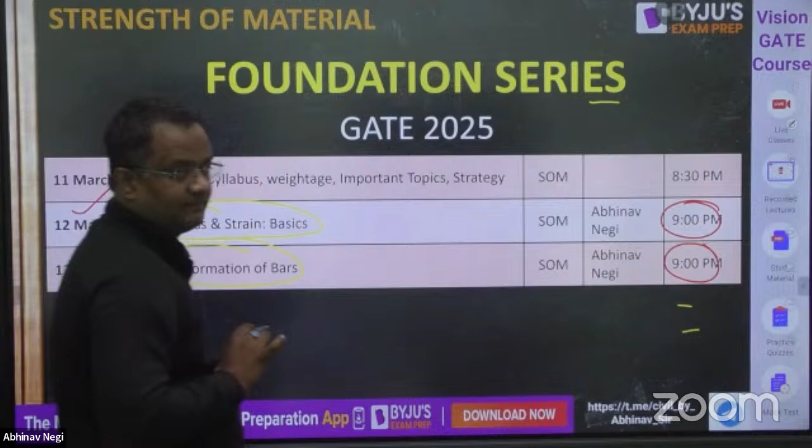Tomorrow it will be stress and strain basics, and deformation of bar the day after. Both sessions will be at 9 p.m. on YouTube. This is on 12th of March and then 13th of March - it will be strength of material.

Then, in the weekend, Saturday and Sunday, I will be taking classes. On Saturday, I will teach you the stress strain diagram, and on Sunday, you will get properties of materials, which will definitely be the properties we are going to teach with respect to the stress strain diagram as well. In these sessions, we will cover both theory plus numericals. The timing will be the same. So that is about my sessions, and this will also show you the way we are going ahead for every topic.

So this is the schedule of the strength of materials - tomorrow, day after tomorrow, and the weekend, by Abhinav sir.

Then next week, another subject will be done. For civil, it will be environment by Richa ma'am from Monday, and for mechanical, it will be thermodynamics by Vipin sir. So every week one subject will be done. Now your question will be, sir, in one week a subject will not be completed - yes, correct. We are not saying that SOM will only be taught in this one week.

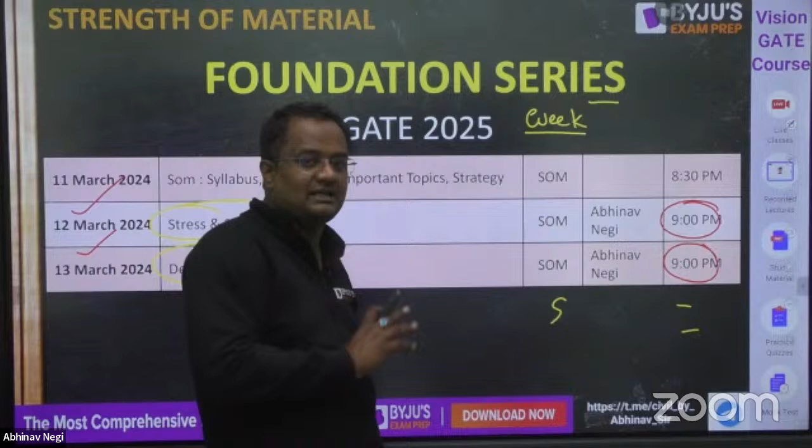There are 50 more weeks to go before GATE 2025, so there will be many more SOM classes. This is just a beginning. Some topics will be taught in this week of SOM, then again in the next week another subject will come - for civil it will be environment, for mechanical it will be by Vipin sir - then again SOM will come. Don't worry about that. Every week we are taking topics, and the topics will be taken not randomly - we'll be taking the topics of the first chapter only.

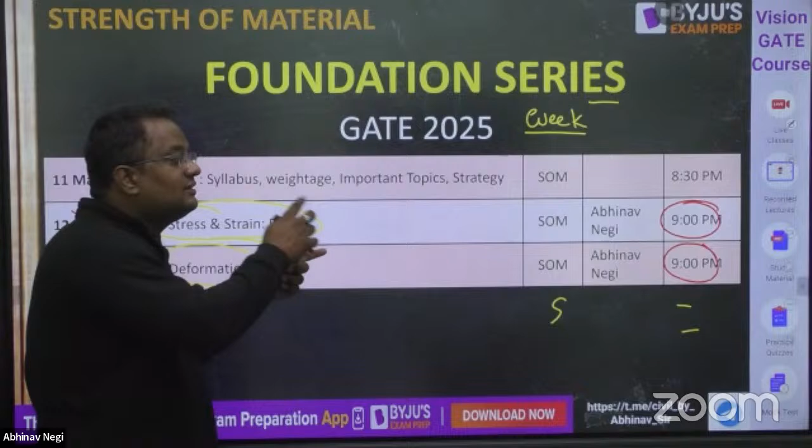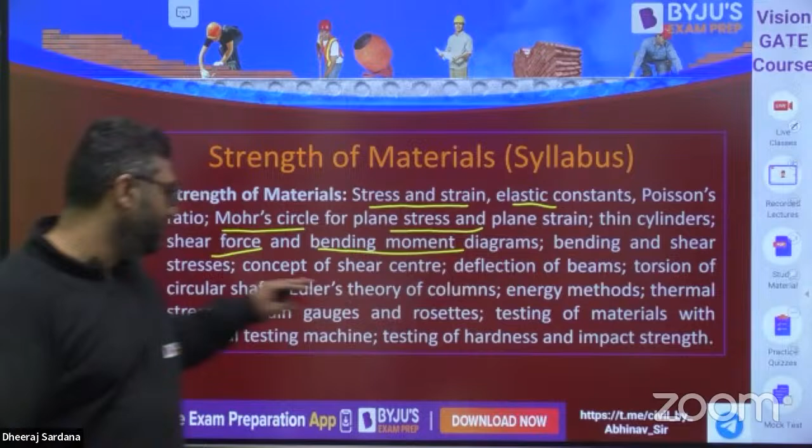So guys, this is the syllabus for GATE. You can say strength of material, stress and strain, elastic constants, Poisson ratio, Mohr circle for plane stress and strain condition, thin cylinder, shear force diagram, bending moment diagram, bending and shear stresses, concept of shear center, deflection of beams, torsion, Euler's theory of column, energy method, thermal stress strain, and strain gauges and rosette testing of materials.

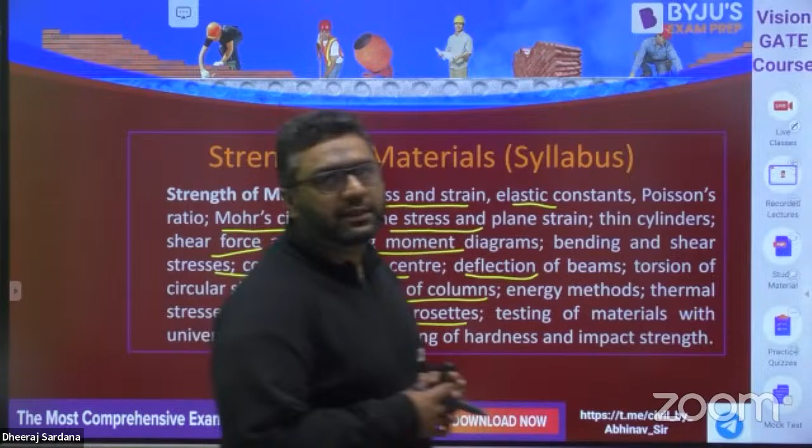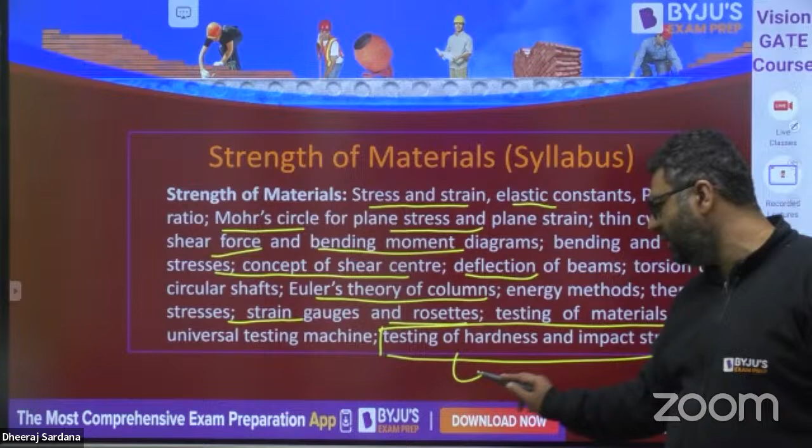So I would like to tell you, for mechanical and civil, almost the syllabus is the same. For GATE and engineering services too, almost the syllabus is the same. Only there is one topic, testing of hardness and impact strength, which is only for mechanical students. All other topics will be common for both mechanical and civil, and the syllabus is the same for GATE and engineering services. Only the way of asking questions is different.

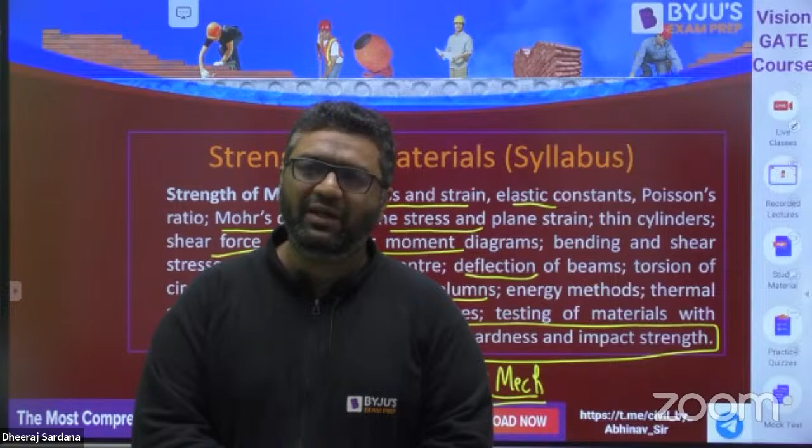So when we teach you, this will be covered for all the examinations where technically strength of material is part of the syllabus.

Now, guys, let me tell you about the weightage of strength of material for civil engineering students. If you see the average weightage of the last 5 to 9 years, strength of material is usually coming around 5 to 6 marks.

Of course, for civil engineers, geotech and environment carry high weightage. Geotech, environment, and transportation will carry approximately 35% of the weightage, and 15% will be aptitude and mathematics. So geotech, transportation, environment, maths, and aptitude will carry around 50 to 55% weightage, and all other subjects combined will be 40%.

But let me tell you, for a civil engineer and also for a mechanical engineer, when you decide the order of subjects, strength of material, engineering mechanics, or fluid mechanics should be the first one. The reason is simple: subjects like structure analysis, RCC, and steel for civil will only be understood when you do strength of materials. Similarly, for mechanical, machine design plus parts of production will only be understood when you have a clear knowledge of strength of material.

So strength of material is a basic subject not only for civil but also for mechanical branch, because other subjects are related to this. For studying strength of materials, no knowledge of other subjects is required, so this can be taken as a first subject as well. Although I recommend doing engineering mechanics prior to this, it's good. But even if you haven't done engineering mechanics before, you can still go with strength of materials.

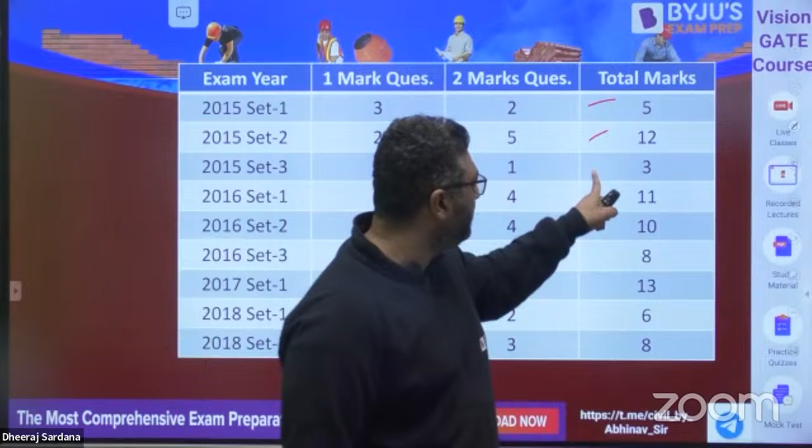Now, for mechanical, sir will tell you about the weightage of strength of material in various years, and of course for civil also I'll tell you. You can see the weightage from 2015: in set 1 it was 5, then 12, then 3, then 11, then 10, then 8, then 13, 6, 8.

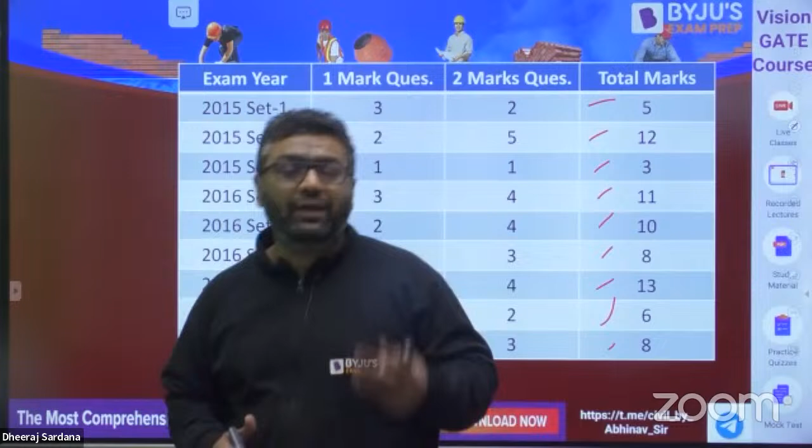So you can see various values here because at that time the paper was offline, the number of candidates was more, and because of that various sets were there. In online exams also various sets were there because the number of students was more. But if you see the recent year weightage, like in 2023 it was 14 marks, in 2022 10 marks, then 6 marks, 7 marks. So if you see the average of the last 10 to 12 years, strength of material is coming for 8 to 10 marks.

The reason for high weightage is that various subjects depend on this, like machine design and metal forming, specifically from production. They depend on strength of materials. That's why the weightage for strength of materials is always 8 to 10, a good weightage. Even in civil, 6 to 8% is decent, and for mechanical, out of 72 marks, it may go up to 8 to 10%. That's a decent one. This is an important fundamental subject you have to do, otherwise you cannot crack interviews either.

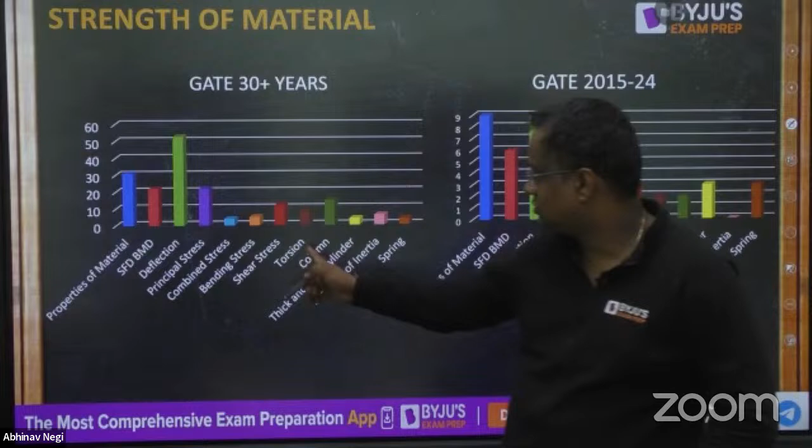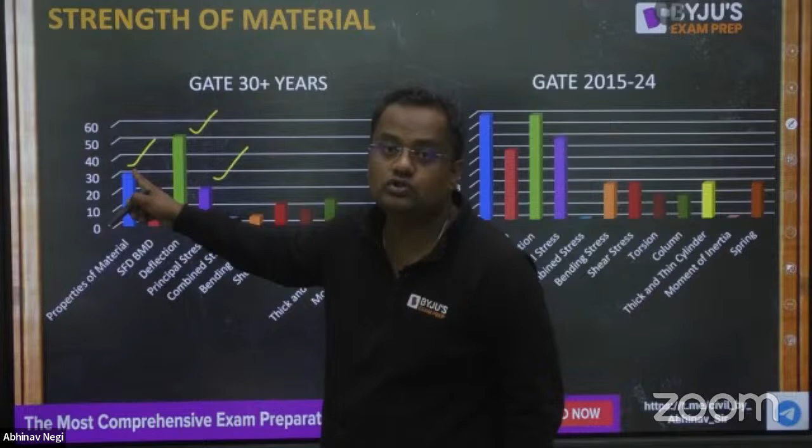Now, for both civil and mechanical branches, what is the weightage of various topics of strength of materials, like properties of material, SFD, BMD, deflection, principal stresses, combined stresses, bending stress, shear stress, torsion, columns, and thin cylinders? Topics like principal stresses, deflection, and properties of material, which includes stress-strain curve, thermal stresses, and Poisson's ratio, along with stress-strain curve, deflection, and transformation of stress, carry almost 60% of the weightage in GATE and other exams too. From these three topics, if you see the last 8 to 9 years, the same topics like properties of material, deflection, and principal stresses are very important, and of course SFD and BMD also.

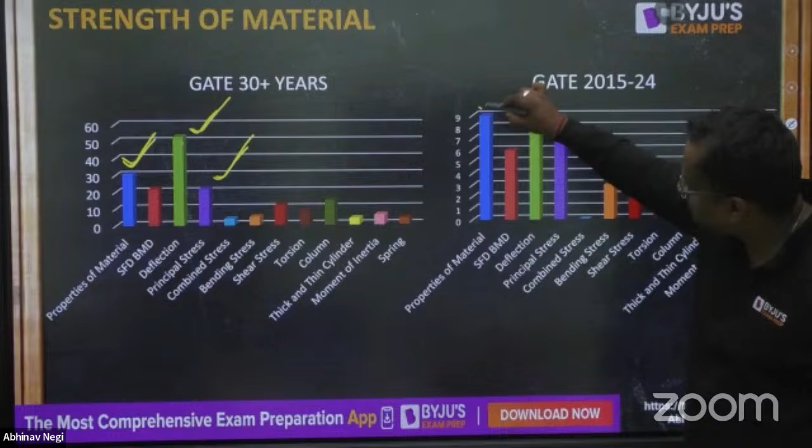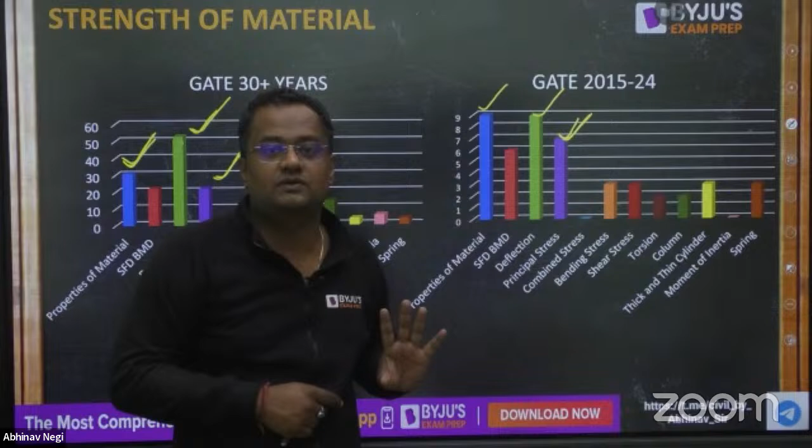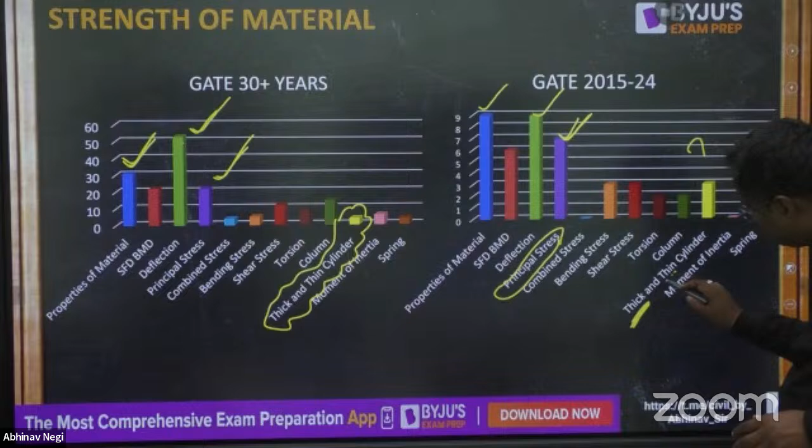In the last 3-4 years, in every set of civil engineering, the question on transformation of stress is there—morning shift, evening shift, both have transformation of stress questions. I've observed this for the last 4 years, this principal stress or transformation of stress. Apart from that, one topic which was asked less in previous years in both civil and mechanical is thin cylinders, but now the question is asked every second year from thin cylinders. Thick cylinders are not frequently asked, but thin cylinders are, in both civil and mechanical. So the weightage of thin cylinders has increased in recent years, and the weightage of properties of material, principal stress, and deflection has increased too—it was already high before.

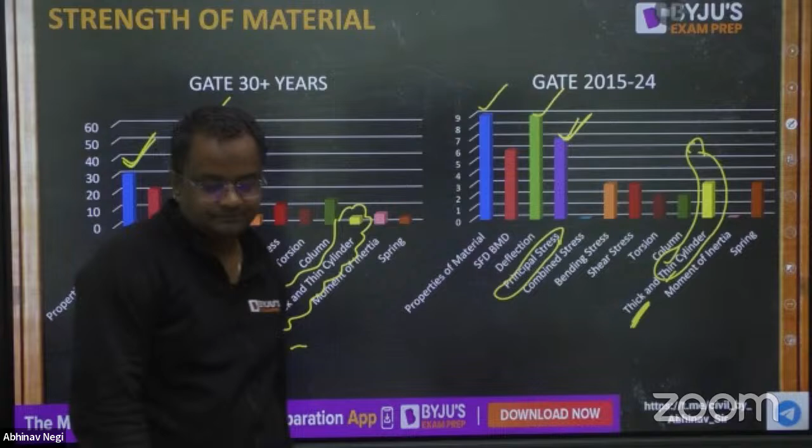Now this is for structures.

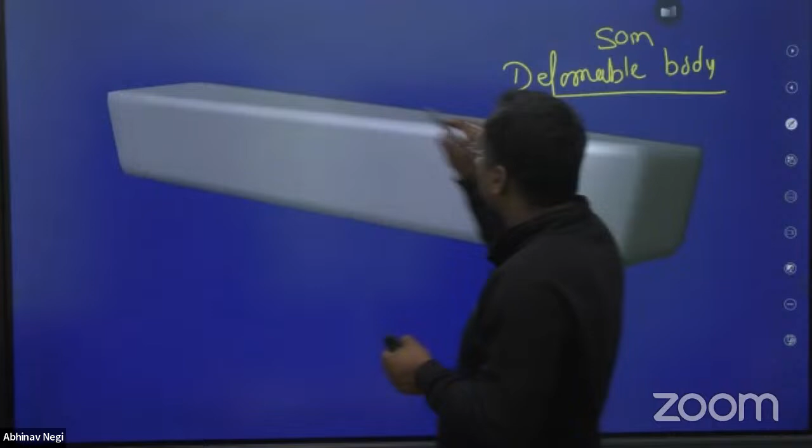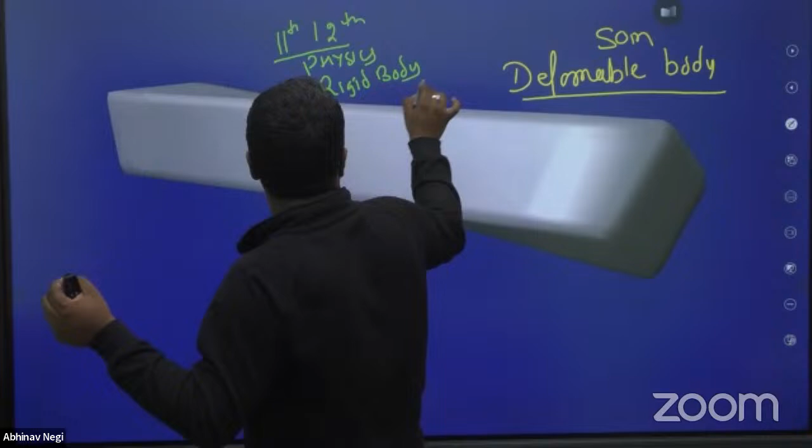Now, what is strength of materials? What will we be studying in this subject? We'll be studying about deformable bodies. Whatever physics you've studied till now, that is rigid body physics. In your 11th and 12th class, whatever physics you studied assumes a body to be a rigid body, except the fluid mechanics chapter and the stress-strain chapter—everywhere else we assume it to be a rigid body. But in strength of materials, you assume the body to be deformable.

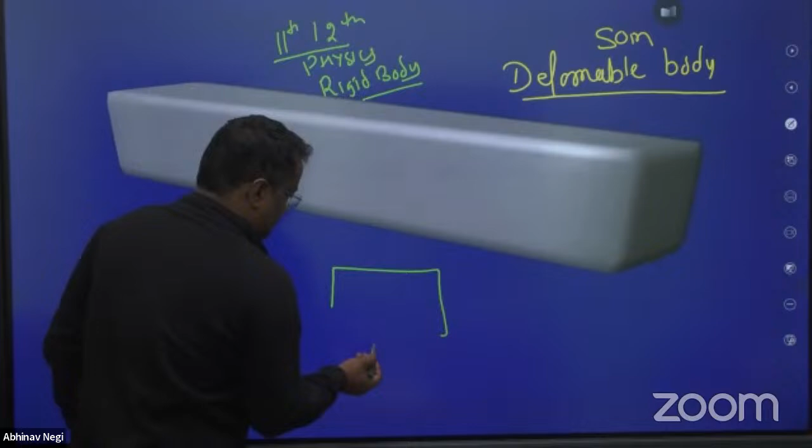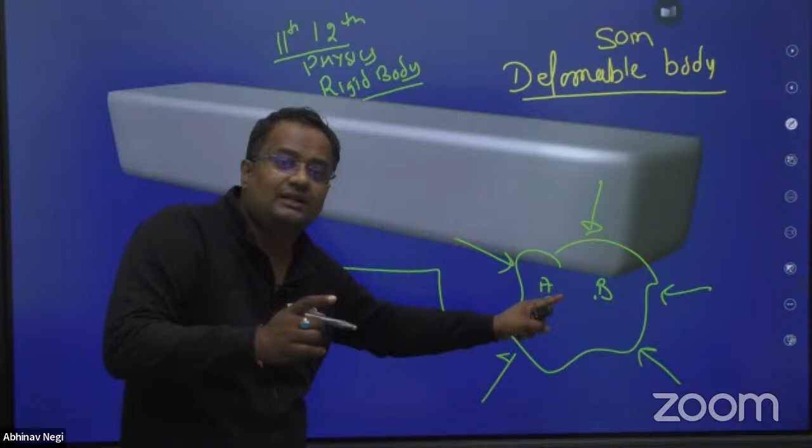Now, what is the difference? Suppose this is a body, it can be in any shape, with two points A and B. Now you apply force on this body in any direction, any number of forces, any direction, any magnitude—I'm repeating, any number of forces in any direction and any magnitude. If the relative position of A and B doesn't change—distance doesn't increase or decrease, orientation doesn't change—then this is a rigid body. Rigid body is a pure assumption; in reality, the length changes, or shape changes, or orientation changes.

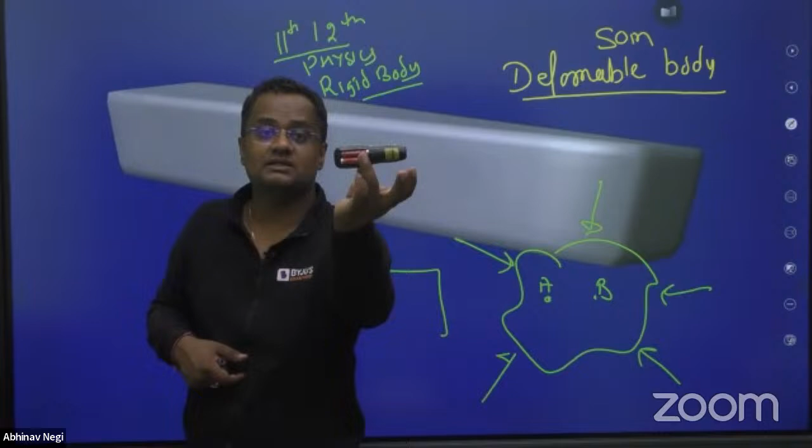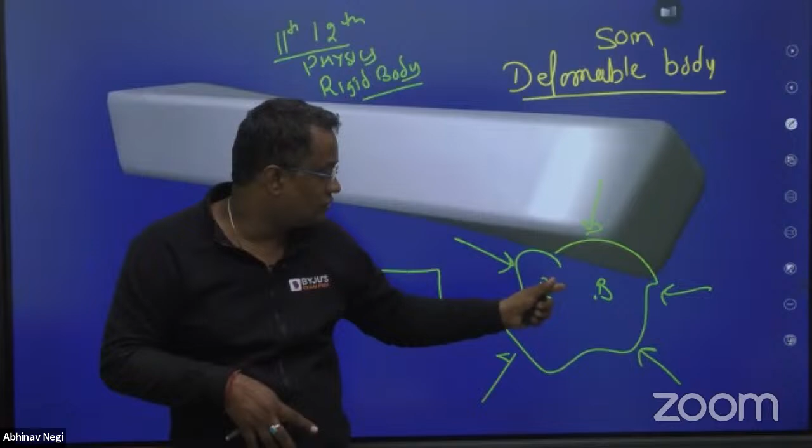That change may be very insignificant, but it occurs. Like in summers, the length of this marker increases by alpha delta T, but that's not visible to our naked eyes because it's very minute. So rigid body is just an assumption. The real physics you'll study is deformable physics—when you apply force and the orientation of points changes, that's deformable physics. Either points come closer, move apart, or orientation changes. That is deformable physics. Over to Dheeraj sir.

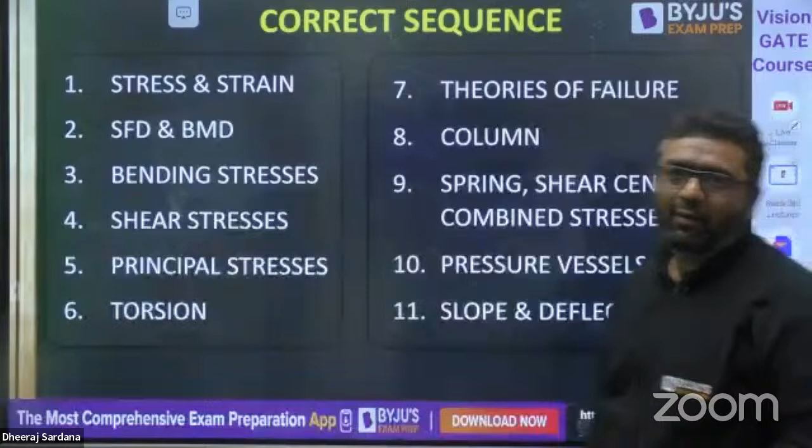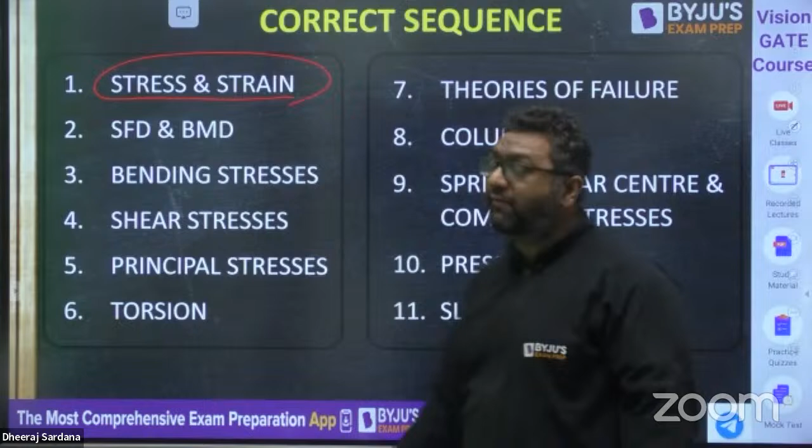As sir has beautifully explained about the deformation of bars, now we are talking about the sequence of topics. In 11th class you have studied the solid mechanics part, where you just defined stress and strain, not going much beyond that. So here we will be starting with stress and strain.

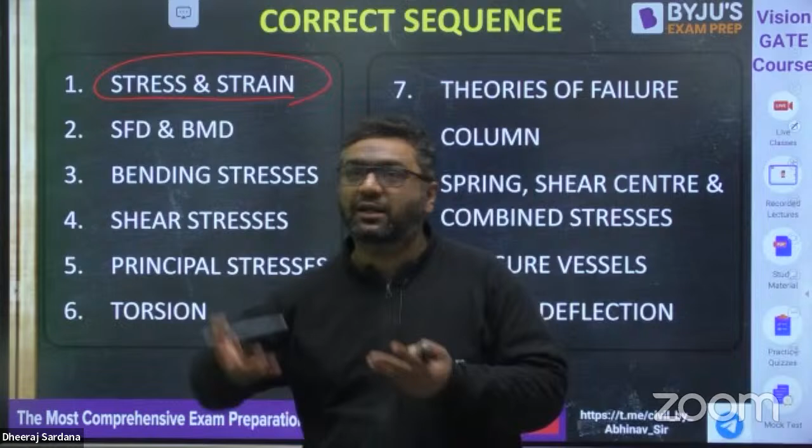We will see the various relations between stress and strain, what are elastic constants, and also their own relations, and how we can find out or calculate the stresses with the help of measurement of strain. Then guys, we will be entering into SFD BMD.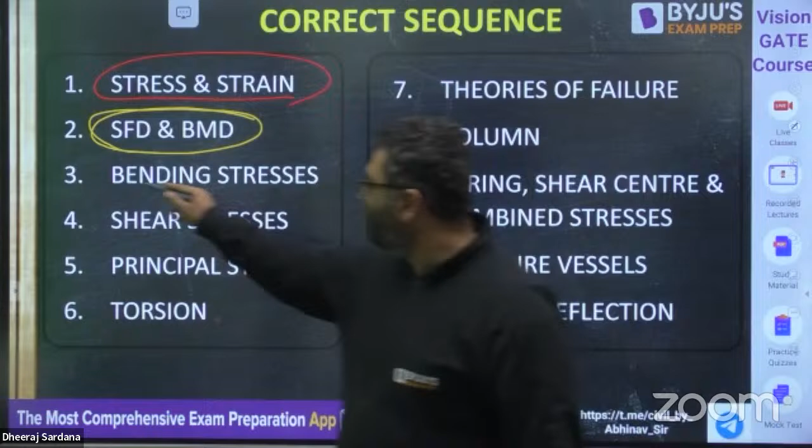This is the favorite part of Abhinav sir also. So then we will be having shear force diagram, bending moment diagram. Then we will be having the bending stresses. After that, the shear stresses.

So here, what we are doing is studying the stresses individually. First we study the stresses because of forces in this chapter. Then we are going to see the stress because of bending couple here. Then we are going to see the stress because of shear force here.

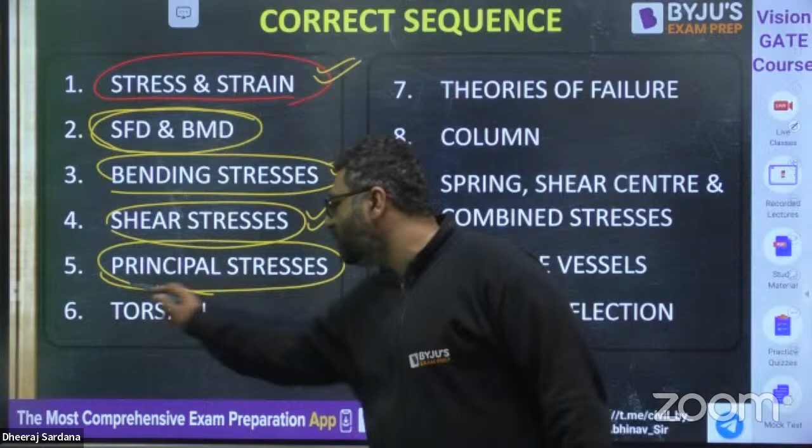So when individual study is completed, then we will accumulate all the types of stresses together to understand the principal stresses or transformation of stresses. And guys, then we will study torsion, which is the shear stresses because of twisting couples, like here we study because of bending couples.

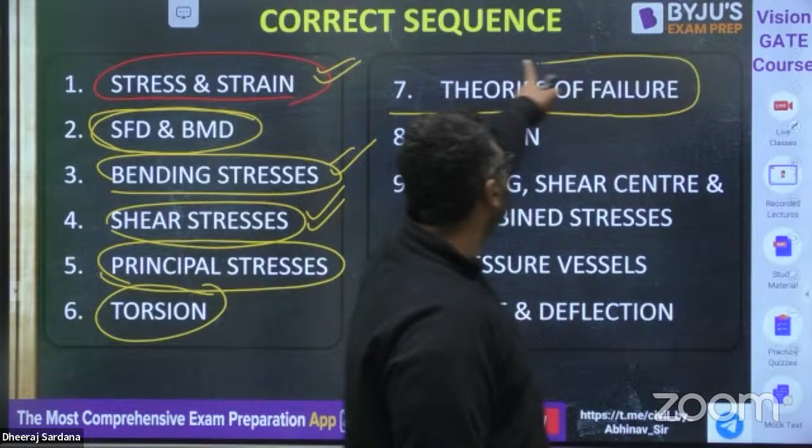Then guys, there is a topic, theories of failure. This is a topic which is going to join design with SOM - how the things are going to be designed is connected with SOM. Like when you go to the doctor, you tell your problems and the doctor gives you a solution. So you can see that solution part when we reach there - that is the bridge to that solution part, theories of failure.

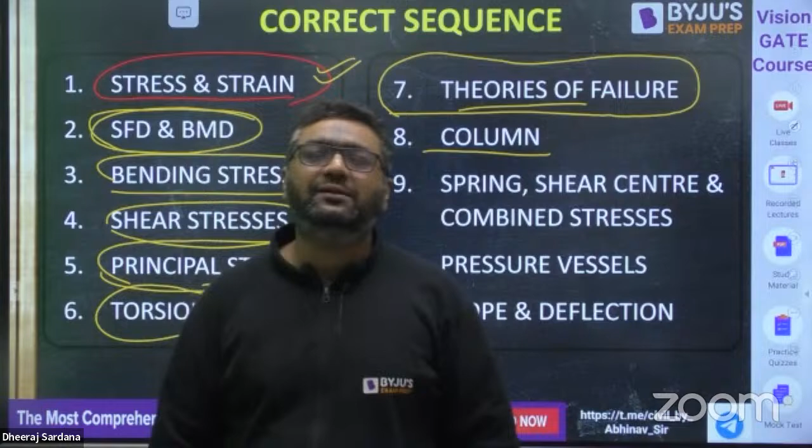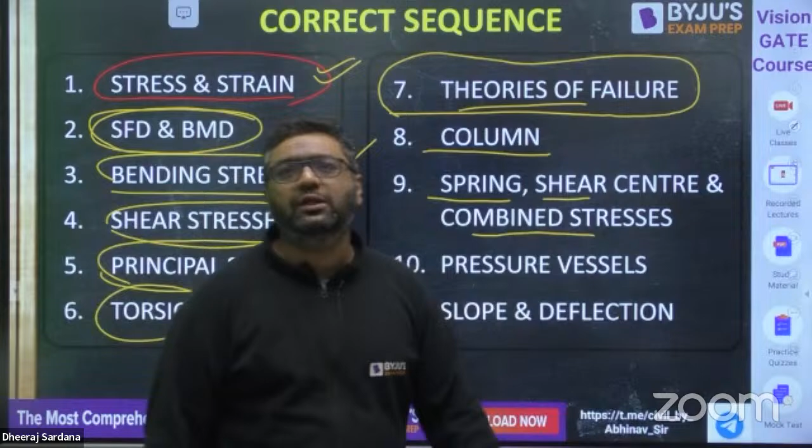Then guys, we are talking about columns, where we will talk about specific members which are axially compressive loading members, majorly used in civil engineering applications. After that, spring, shear center and combined stresses. Combined stresses means here bending and torsional, if combinedly acting, what we will do. And spring, you know, is a mechanical element, like column is a structural member.

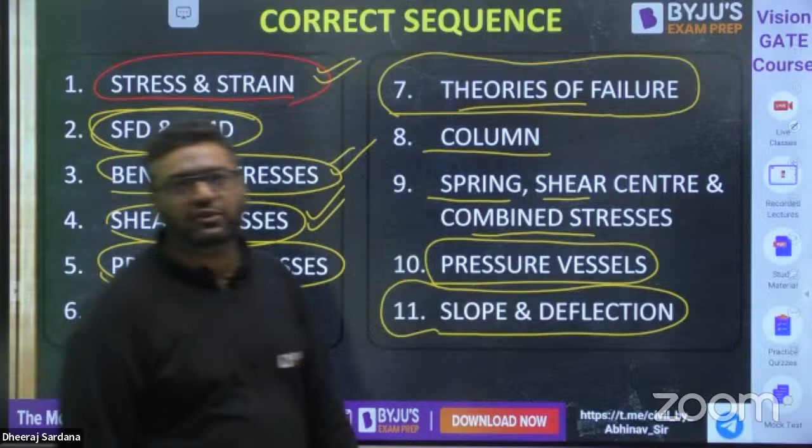So guys, after that we will go to pressure vessels, which are used to handle fluids basically. And then we will have slope and deflection. So guys, this is the kind of sequence which is generally followed, and when we are talking about importance, sir has already told you. So this is how generally things are followed in any textbook.

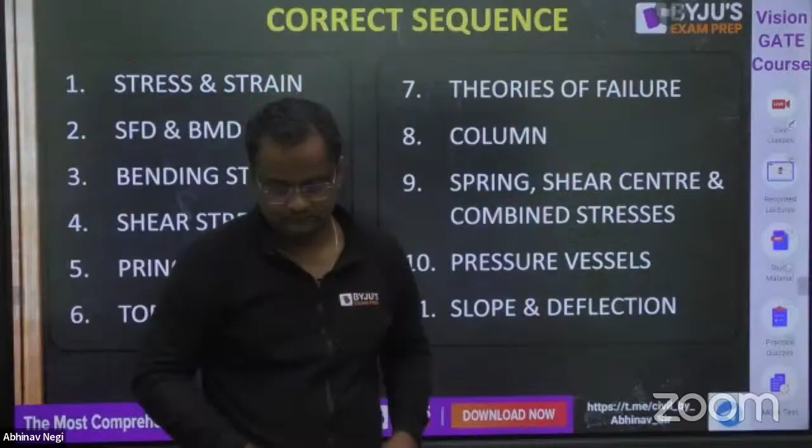Now sir will be telling you a very important point. Now, guys, you have understood the sequence - in this sequence you should study. Now, what are the topics, guys?

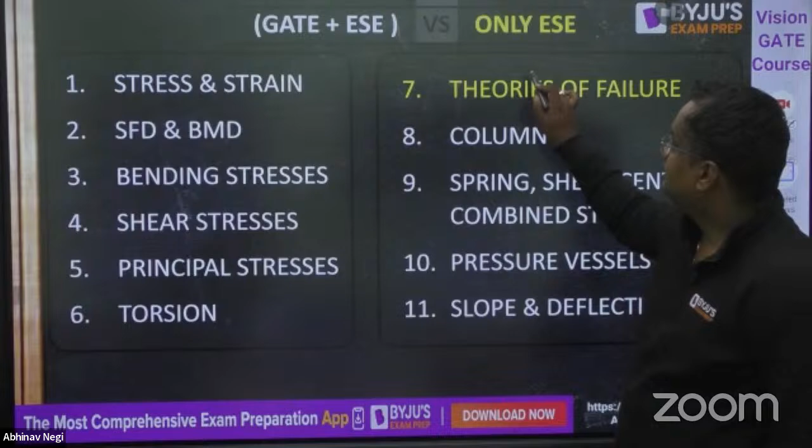These are all clear topics in both GATE and ESE. But theory of failure is only in ESE for civil engineering students, and that too from the last 2-3 years only. But for mechanical students, all our students must study theory of failures also for GATE also, because in SOM it will come anyway, but in machine design it is totally dependent on theory of failure.

Guys, I would like to add that when we talk about theory of failure in the GATE syllabus for mechanical, theory of failure is mentioned in machine design. It is not mentioned in SOM. Although we study it in SOM, because otherwise you will not be able to enter into machine design.

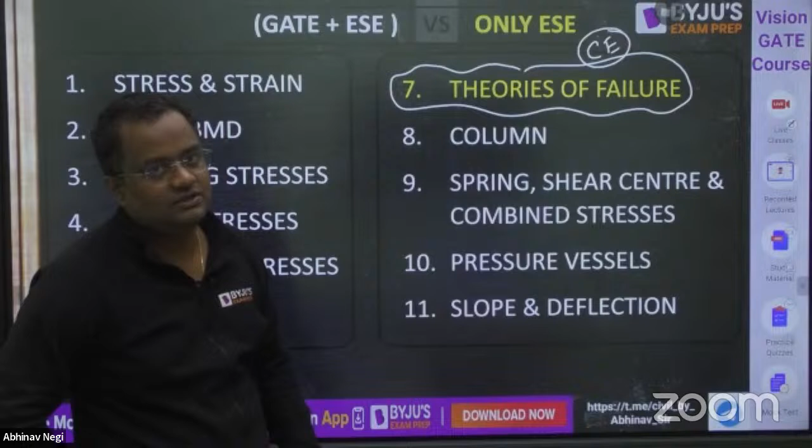So guys, for civil engineering, theory of failures is not in the GATE syllabus, but if you're preparing for engineering services, you should do it, because it is not a very big part. So these are in GATE and ESE, and that is only in ESE.

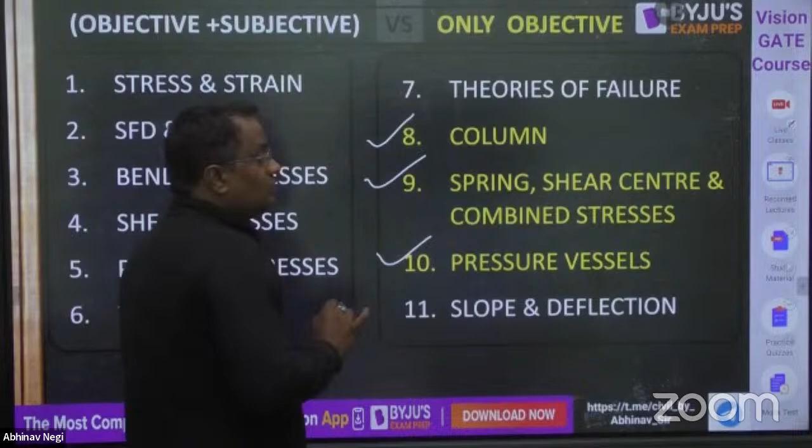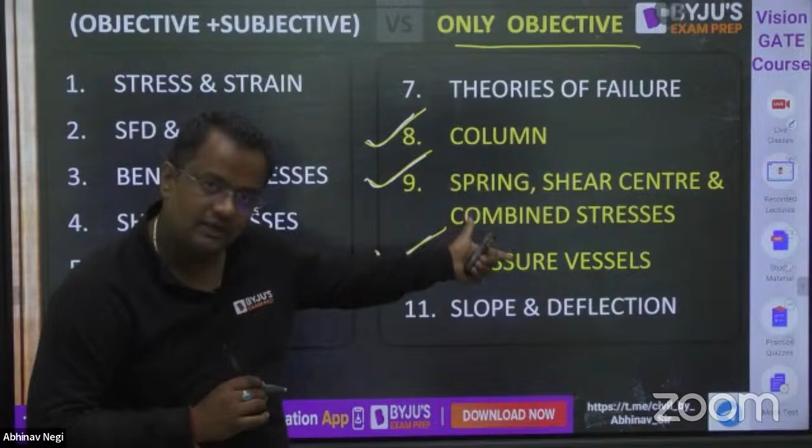Now guys, these topics - column, spring, shear center, combined stress, and pressure vessels - the questions are usually asked in objective only. Although if somebody wants to make it subjective, we cannot stop him from making the subjective problem. Even the subjective problem can be asked from here also, but usually we'll be expecting objective problems from here.

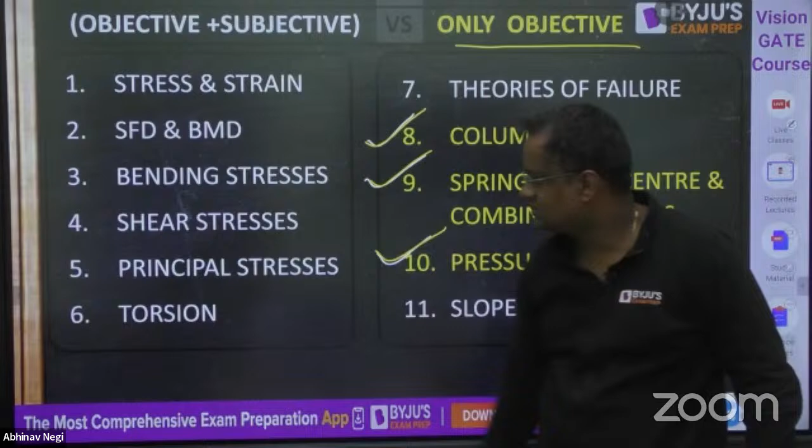And if you're preparing for mains or subjective of any other exam, then usually the subjective questions will be coming from stress and strain, SFD, BMD, bending stresses, shear stresses, principal stresses, torsion, theory of failures, or slope and deflection. Usually the subjective questions will be from there.

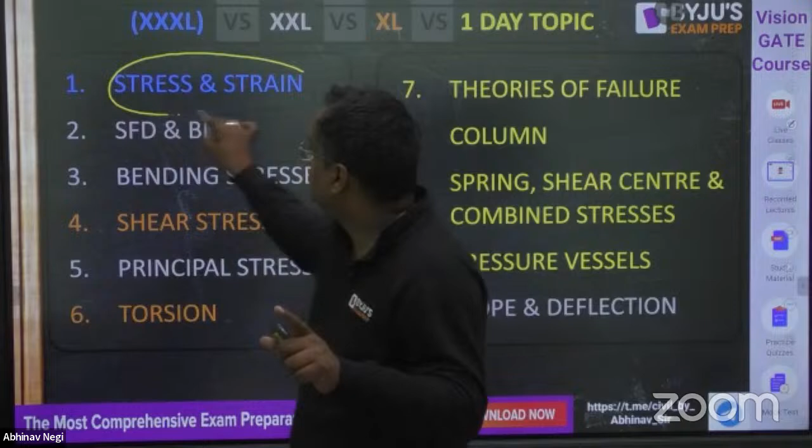Now about the length of the syllabus, guys, the biggest subject is the first chapter, stress and strain, which includes stress and strain curve, Poisson ratio, thermal stresses, deformation of bar, elastic constants and everything. Then after that, SFD, BMD, bending stresses and principal stresses are the second biggest subjects.

Then after that, guys, shear stress and torsion. And this is also the second biggest, slope and deflection. These subjects can be done in a couple of days also.

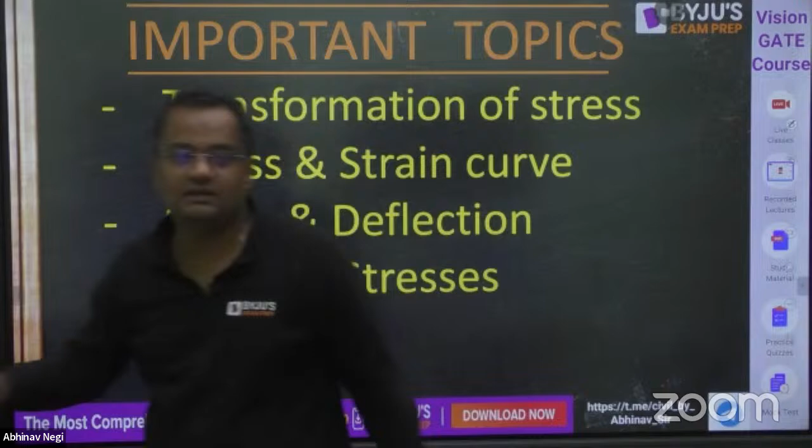Now, sir will be telling the important topics for civil and mechanical both. Sir has already mentioned one thing, that he was observing from last 4 years that questions are coming from this topic, transformation of stresses. This is very, very important topic for mechanical and civil both.

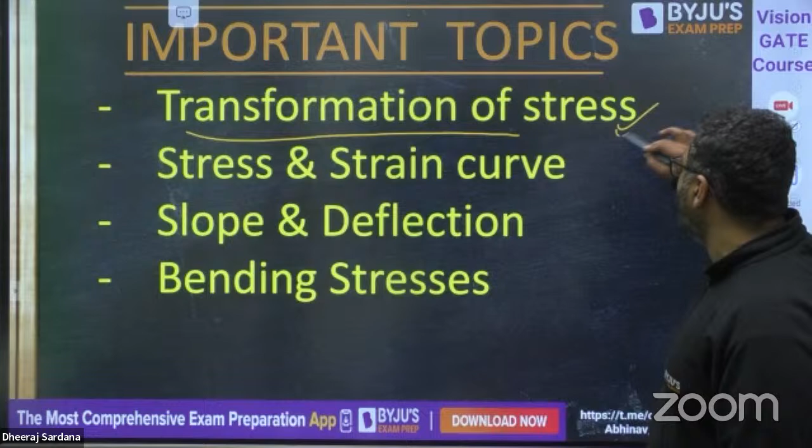Even in mechanical, every year you will find one question from this. In civil also, questions are coming regularly and every year. So guys, this is going to be the most important part. You must be aware of a word known as Mohr circle, which comes in that chapter only.

Second important thing is stress strain curve. This is also becoming very, very important for engineering services point of view, because ESE people are generally asking some theory questions as well, which are very beautifully framed from the stress strain diagram.

Then guys, third one is slope and deflection. This is a topic where mechanical will be asking one question, but in civil you may find sometime two questions from the same chapter are framed. So slope and deflection is going to be very important topic for both mechanical and civil.

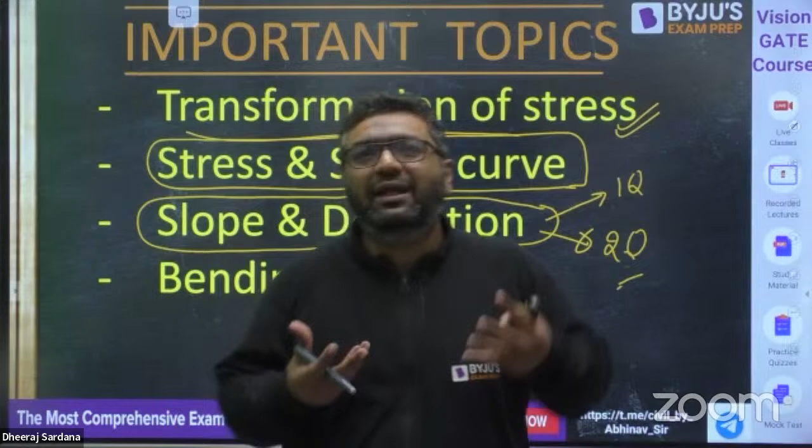If you find the PYQs trend like last 30 years, you will find more questions in civil - in mechanical like 20 questions, in civil like 30 questions, that kind of trend you will find. And when we talk about bending stresses, the last important topic is bending stresses, where we look at the bending moment and its applications.

Now, guys, if you're preparing for GATE and ESE both, what are the topics that are in GATE and ESE both? What are the topics that are only in ESE? What are the topics that are only in GATE, if there is something like that? That a complete session, guys, I have taken on YouTube - the same thumbnail will be there. You can search it: Abhinav Negi, Byjus, GATE and ESE differences or similarity.

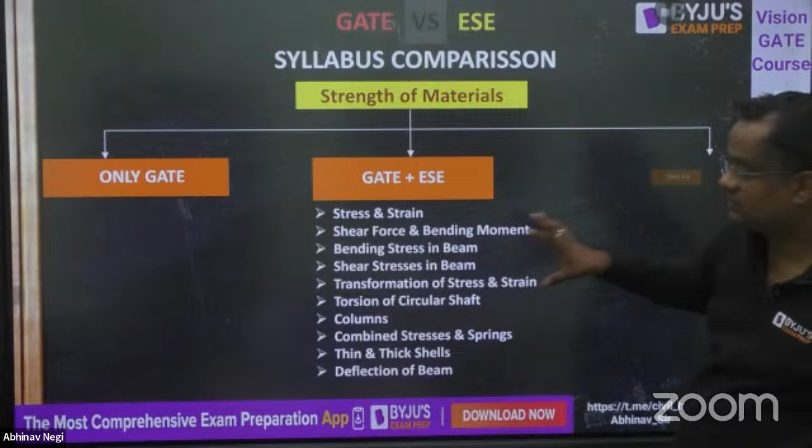And you will get, for every subject, a detail like this - what are the topics that are in GATE and ESE both, what are the topics that are only in ESE, and what are the topics that are only in GATE. There is nothing like that in strength of material. So for every subject of civil engineering, I have done this analysis.

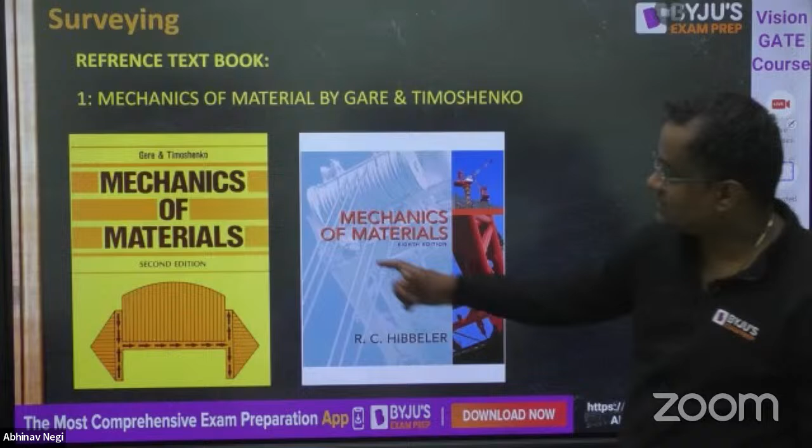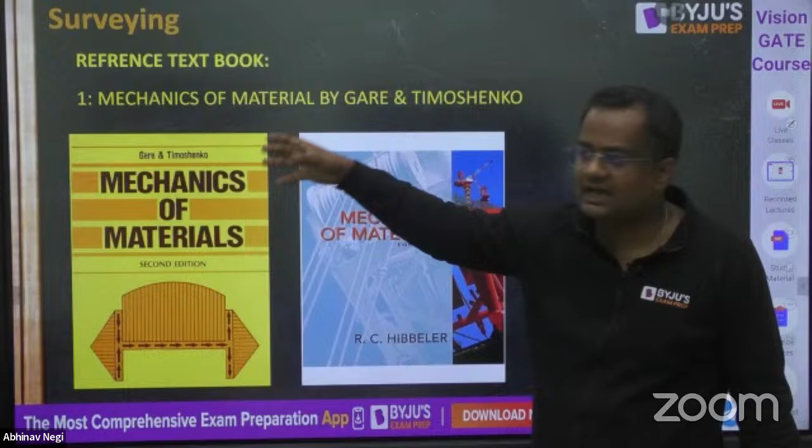Now, what books should be studied, guys? Let me tell you, this is the only book which I have studied complete, irrespective of seeing the syllabus, whether it is in the syllabus or not. I enjoyed that much while studying this when I was in BTech. I have not checked whether this is in GATE or ESE - I studied that book like I'm studying for strength of material.

Same is this book by Dheeraj sir. Dheeraj sir will be describing more about these two books, but let me tell you students, even if you are studying this book or any other book, for civil and mechanical the whole book is not required, because from a book only 60 to 70% are the things related to the competition exam.

If you want to be a teacher like us, then you can study the whole book. Otherwise, for GATE and ESE preparation, only selective study within the boundary of the syllabus is needed. So even if you are preparing and referring to these books, study only some parts.

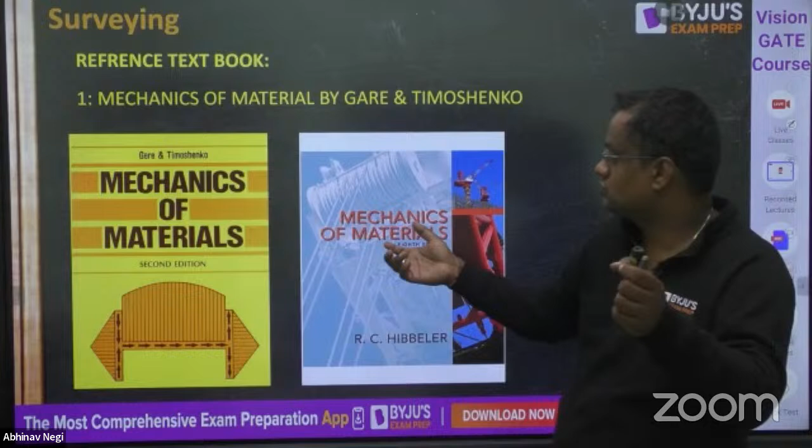Then what is the specialty of this book? Which book is good for theories and numericals? Dheeraj will be telling that better. Sir was saying his favorite is the first one, and my favorite is the second one.

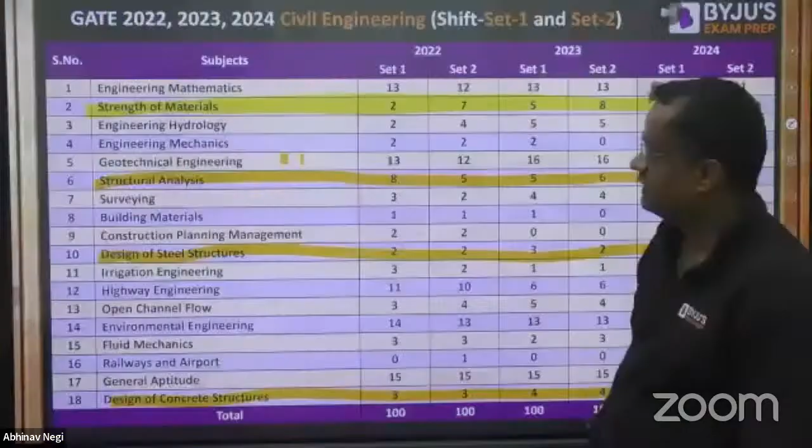Now about the weightage analysis of strength of material in the last 3 years, the average is around 6 to 7 marks out of 100 in GATE. In engineering services objective paper, out of 300 marks with 150 questions, every question is of 2 marks.

You can see my session too. I've taken a 1-year preparation strategy session for GATE and ESE 2025, just 2 weeks before, where I told the pattern, cutoff, and everything.

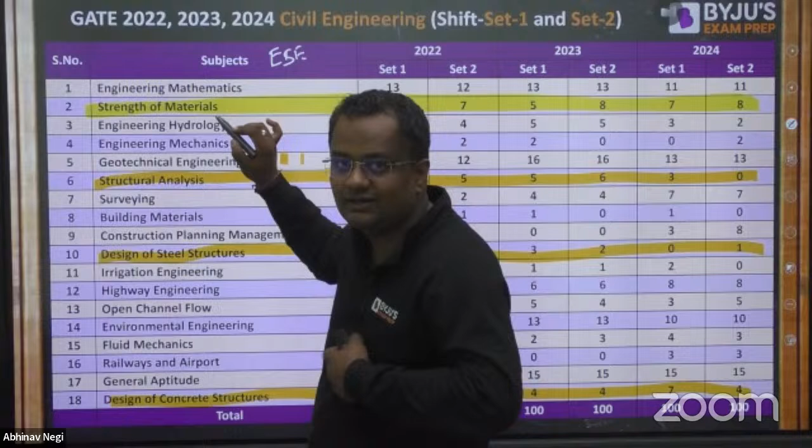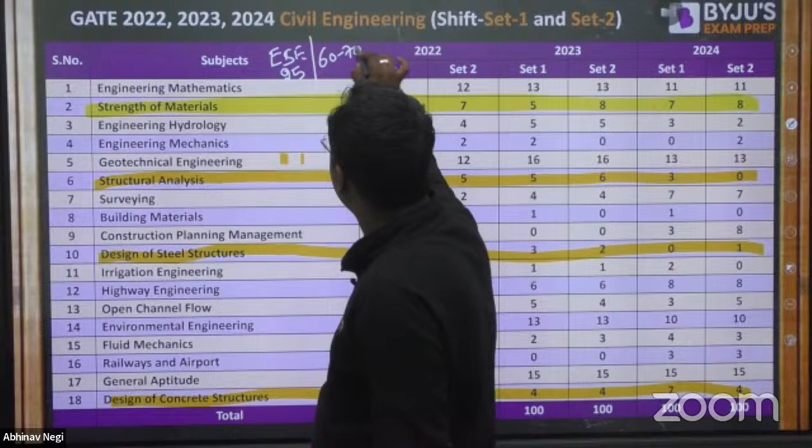For ESE objective out of 300 marks, you can expect around 25 marks, that is around 12 to 15 questions from strength of material. And in subjective, you can expect around 60 to 70 marks from strength of material out of the 300 mark paper 1.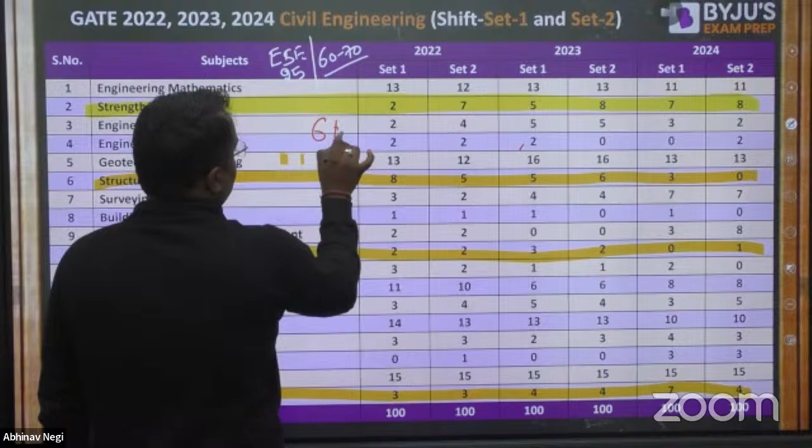Now these 6 to 7 marks are directly of strength of material, but structural analysis averages 4 marks, steel averages 2 to 3 marks, and RCC around 5 to 6 marks, all directly depending on strength of material. So SOM's weightage is 6 to 7 marks directly, plus structure 3 to 4 marks, RCC 6 to 7 marks, and steel 2 to 4 marks - these 13 marks are directly depending on SOM.

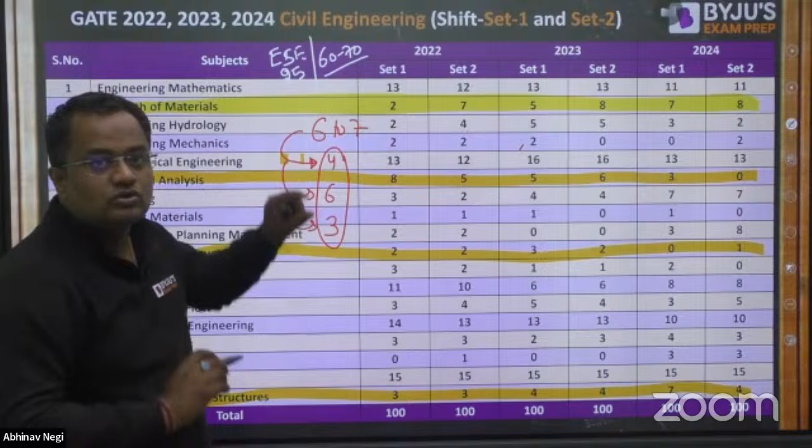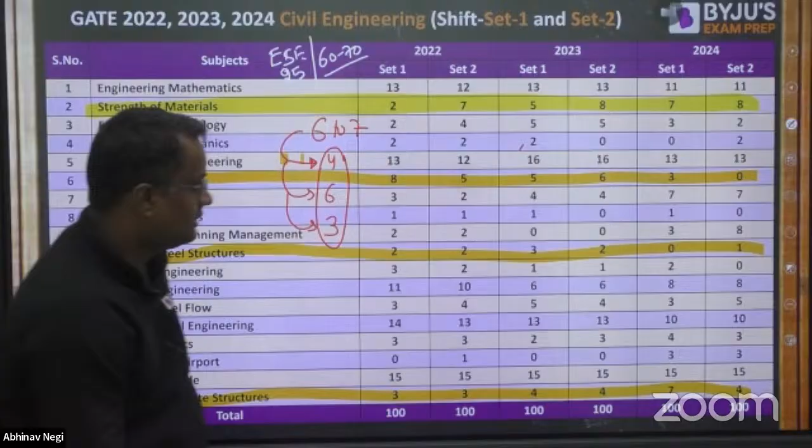So SOM will fetch you 6 to 7 marks directly plus 12 to 13 marks indirectly. Even a few chapters of highway engineering and geotech, like the shear strength chapter, are related to SOM, but I am counting only structure, RCC, and steel, where 80 to 90% of topics are directly related to SOM. Now Dheeraj sir will be telling about mechanical engineering.

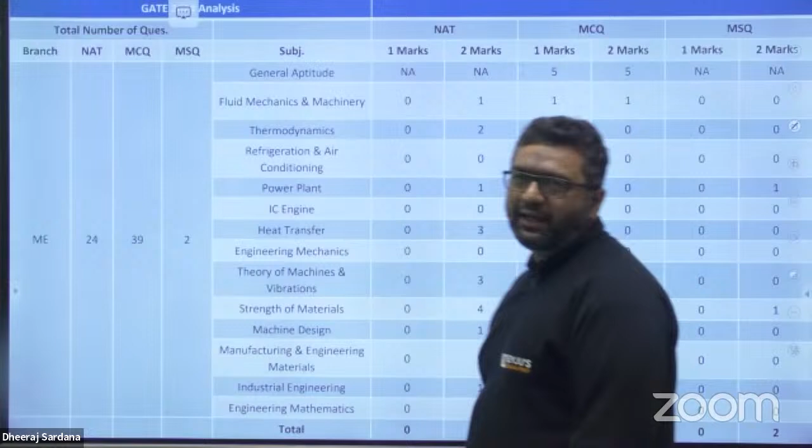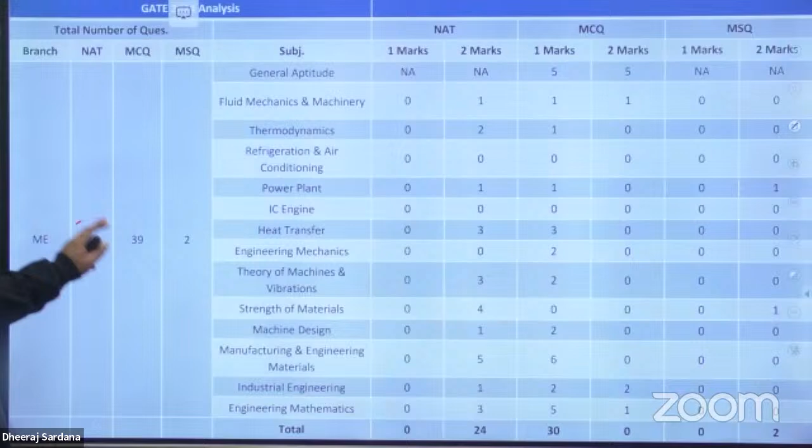This is the 2024 weightage analysis. We mentioned why NAT, MCQ, and MSQ - all 3 types of questions - are coming. In NAT you fill in the blanks, in MCQ one option is correct, and in MSQ more than one option can be correct. You can see the number of questions: 24 for NAT, 39 for MCQ, and 2 for MSQ.

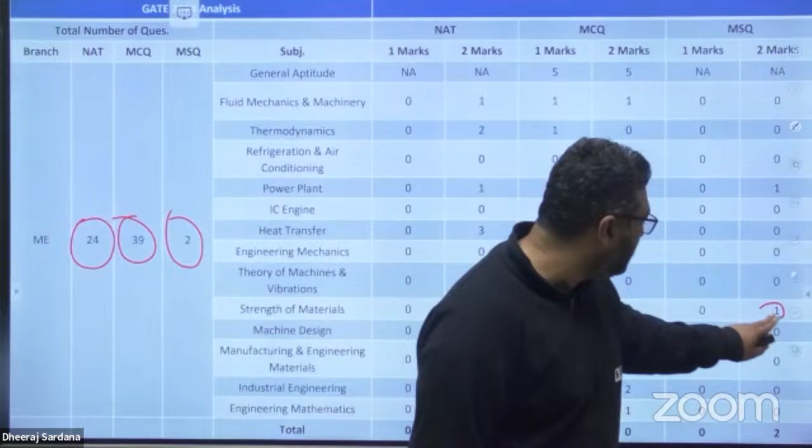If you look at strength of material here, 4 questions of 2 marks were in NAT, and 1 question was MSQ. So you can say 5 into 2, 10 marks were straight away asked. And I would like to tell you one more thing, like when you go to manufacturing.

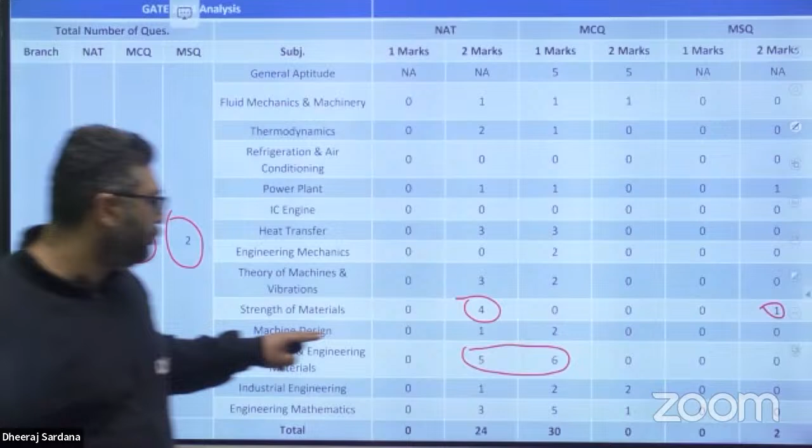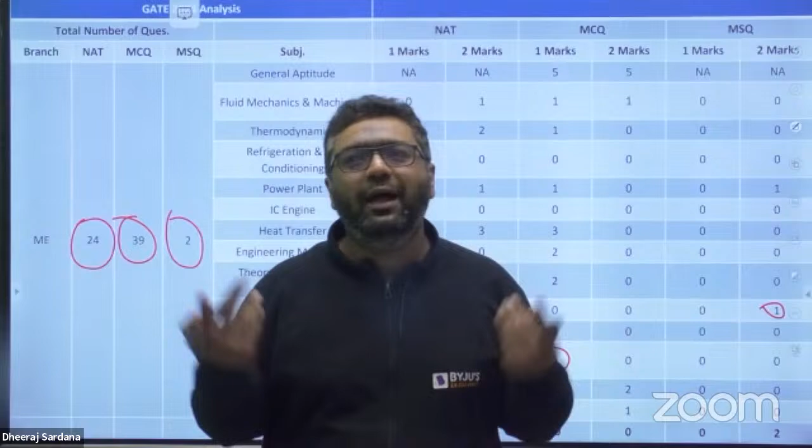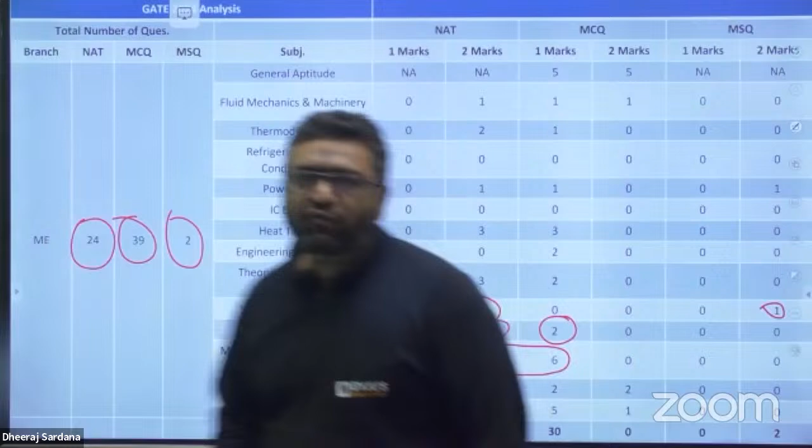Whatever 18-20 marks weightage is there, out of that, 4 marks are directly depending on strength of material. Plus, machine design part is also totally depending on strength of material. So it is like if you don't know SOM and you are going to machine design, it's like you don't know what your pain is and you are going to a doctor. The doctor is asking what is the problem and you are silently sitting there. So without SOM, you cannot study MD. In machine design, this year the weightage was approximately 4 to 5 marks, and generally it is 4 to 5 marks every year. So you can see those entire marks are depending on strength of material.

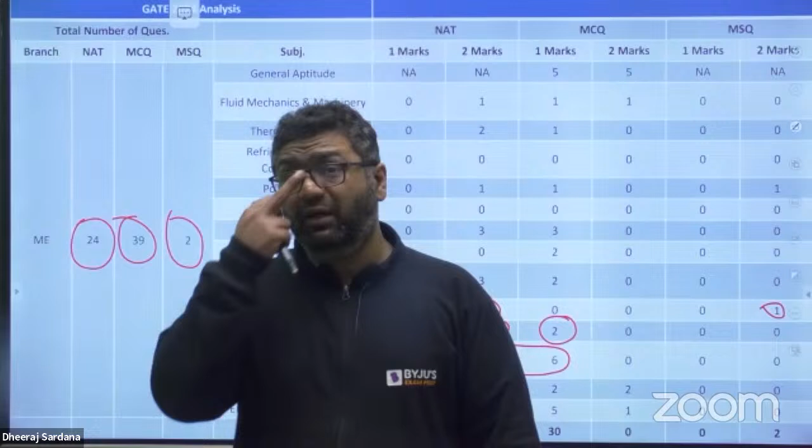The third and very important thing is the interview. In any interview, rarely will there be a case where you will not be asked anything from strength of material. So that is why it is going to be required a lot. So this is about the weightage analysis - approximately 18 to 20 marks are going to be affected by strength of material.

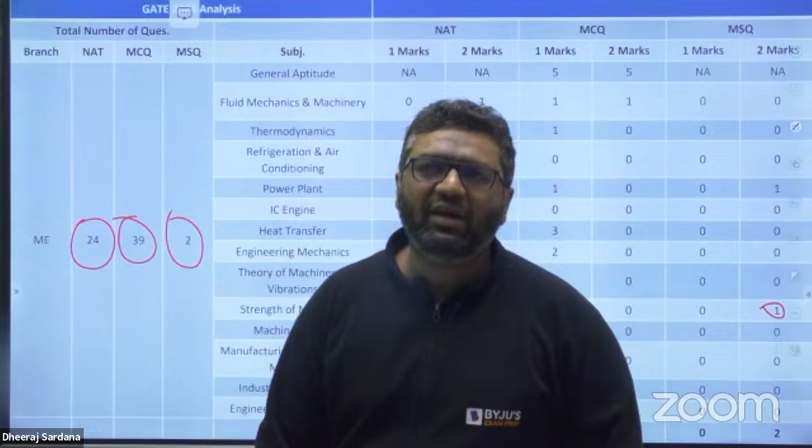You can join us on our Telegram groups - Civil by Abhinav sir, or for mechanical students, Mechanical by Dheeraj sir. Dheeraj Sardana sir, not just Dheeraj. Only Dheeraj Sardana - famous personalities, guys. Sir is not added, like you generally call Narendra Modi, not Modi sir, just Modi ji. No sir, it's not like that.